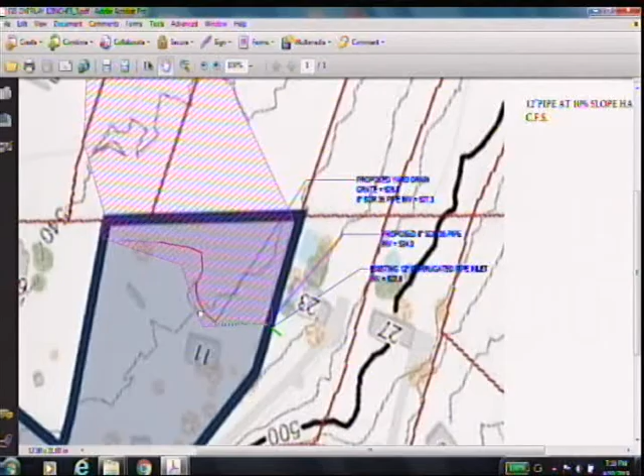Based on Scott's comment, I made a quick analysis calculation for this area here. Based on this shaded area, which is approximately what goes into this 12-inch pipe, the flow going in will be 4.37 CFS. And this 12-inch pipe, based on the slope from the GIS, goes under the driveway of the neighbor and goes into open channel from here along this swale. And then it goes again to a concrete culvert into the catch basin along Glen Hollow Drive in this part.

I believe Scott mentioned to include this area all the way up to here for the calculation. Is that correct? Well, yeah, I was looking for what you're adding to that pipe, what is in it already, and then what the capacity is. So the only number missing, it's a big change, and usually I get the support information too, the input data. Yeah, this is just a quick one. Which I assume you have, okay. So, it's usually the three numbers.

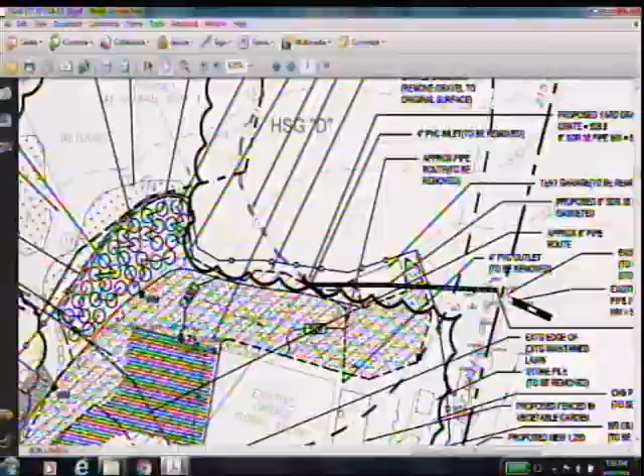And so what are you proposing with that channel on the adjacent property? Yeah, we're proposing to put a pipe from here, redirect this water here, and go into this pipe. The outlet of this pipe will be into the open channel. And it's piped because right now there's a 4-inch pipe from here that discharges to the back of this barn, and sheet flows and contributes to the catch basin here that overflows into the driveway. And during last meeting, it was suggested to redirect and bring it here, since from Scott's map, this area originally drained into here.

Yeah, but the section that it's discharging to right now is open, and then there's a pipe. So the new connection is going to discharge at the property line to an open ditch. Yes, correct. Okay. And then there's a short distance, and then that's going to go into an existing pipe. Yes, correct. Okay. And in that ditch, are you proposing to reinforce that? Yeah, like put some riprap stones, because right now it's just soil.

Right, so the CFS going into the pipe is a little over 4. Is that the same that's going to be coming out into that open ditch? In other words, have you analyzed the discharge point as to what you need for erosion scour protection, based on the CFS coming out of that pipe into an open ditch before it gets into a pipe, so that you're not creating more scour, but actually using an engineered method of avoiding scour? Yeah, right now we don't have that, but we will be providing it, because that's part of Scott's comment, to give the detail of the connection and the open channel there for the riprap.

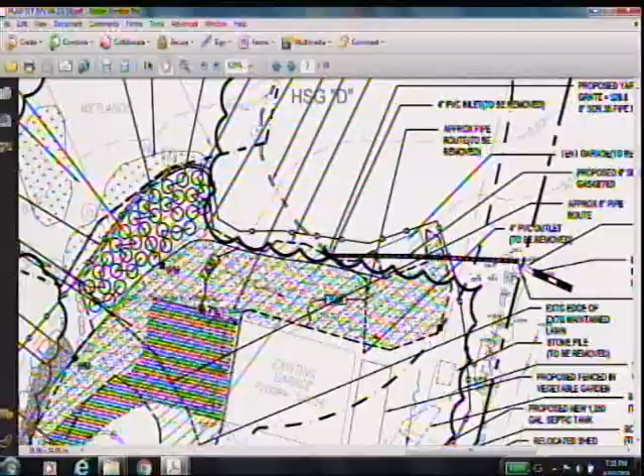And the other comment from Scott also is regarding this pipe that will be connected to this existing catch basin along Glen Hollow Drive. So the details for this connection will also be submitted to Scott once we have that one.

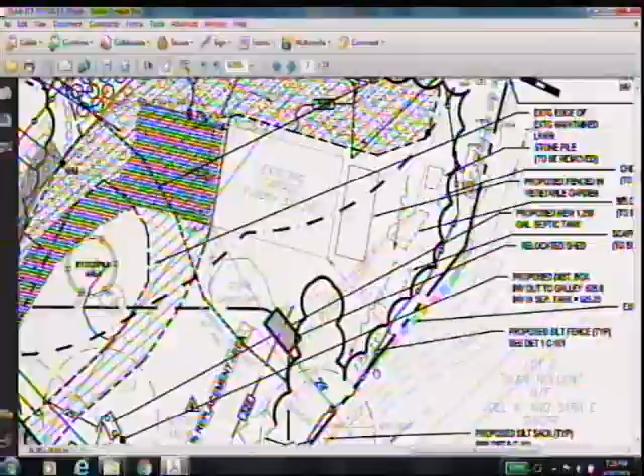I have another question. The invert that is in the proposed yard drain is 527.3. Is that set at the existing bottom of that swale? The invert of this 8-inch, yeah, that's the current. 527.3, that's currently the bottom of that existing swale that you're catching? Yeah. In other words, you're not going lower? No, that's the invert of the existing 4-inch pipe here also. Okay.

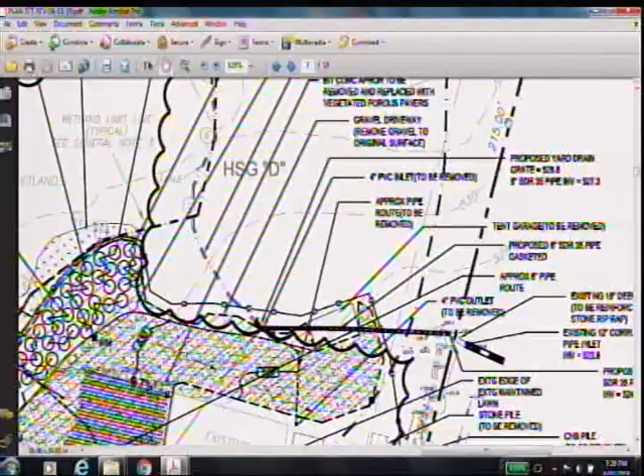So I know that you were here, I think it may have been the very first public hearing that we had on this. There was at least one neighbor that had concerns about how much water's been observed. And I know we had talked about it at the last meeting, with the berm and having a connection like this. Is this, in your opinion, going to address that excess water, the flows that people have been seeing in the neighborhood?

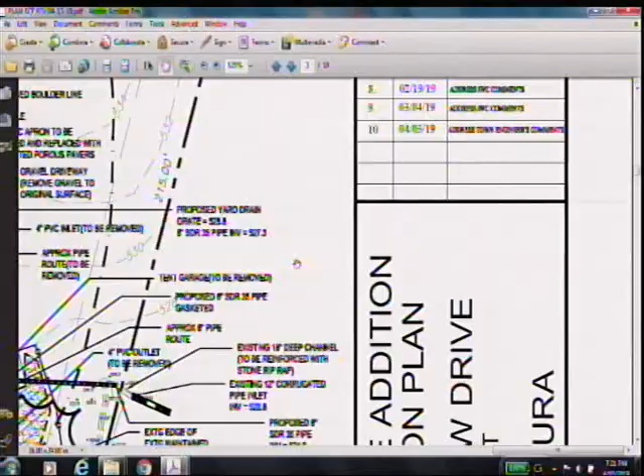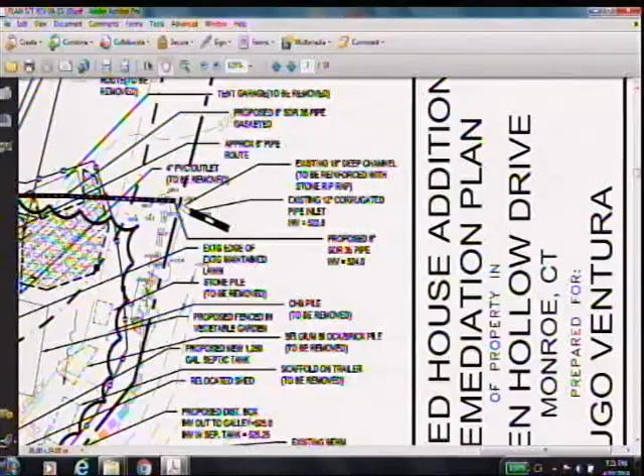This neighbor, number 23 Glen Hollow, is the one that will have the most benefit from this one. The second hearing we had, there was a neighbor from way down, 3 houses down. And actually, we are not providing any water through to him. On one occasion where it rained, our client took a video of the water that's coming from his driveway. It goes to the first catch basin here. Unfortunately, it's in his phone, but it doesn't play in the computer.

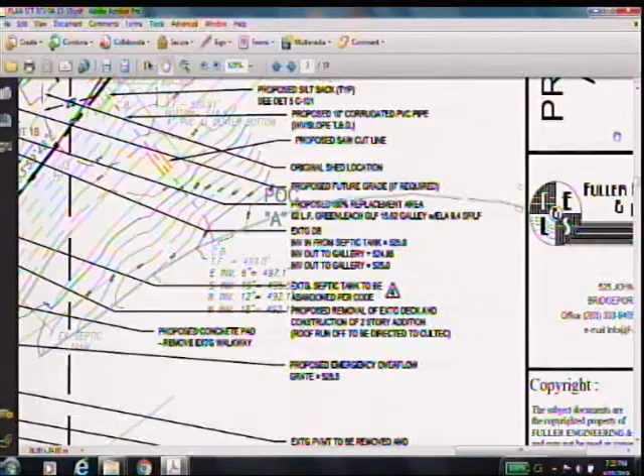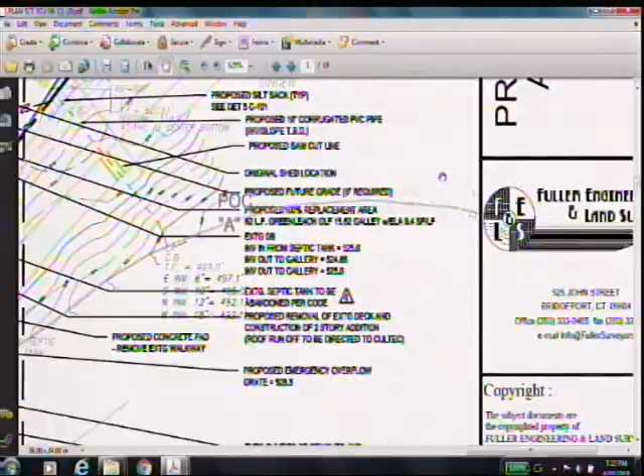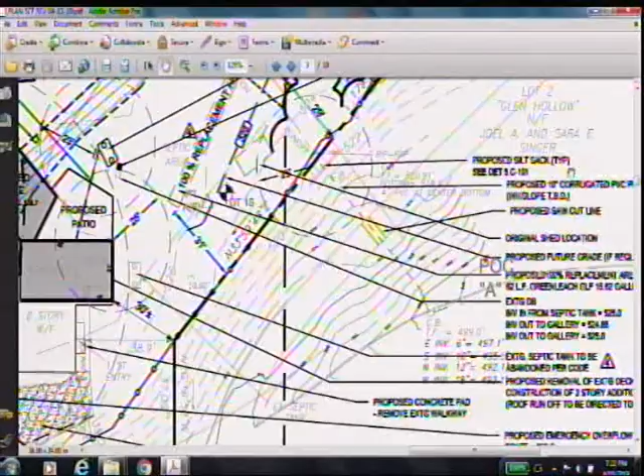The water goes into this catch basin here, and that neighbor, I think number 33, way down here, has no water from these two properties because there's also another catch basin, this one, before it goes to his driveway. So technically, the water is not from the upper properties. Okay. I have no questions. Sounds better than it was before, with all that water flowing through.

Scott, are there many of your comments that have not been addressed by the new application? Well, there's a number of my comments that have not been addressed, but at this point the comments remaining are really about the drainage system on the abutter's property. And it's more engineering, public works stuff. It's not really wetlands. And it's stuff that I could just get verification after you approve it.

Oh, there's one thing I just wanted to add on those last minute comments: an approval, if you grant it, should be contingent on them providing verification of the procurement of a public works permit to connect to the catch basin prior to the pre-construction.

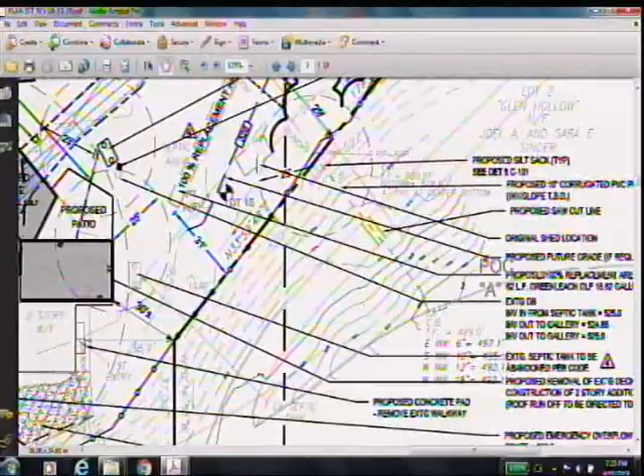The couple of things that I was still concerned about was in the front of this garage. There still is not a heck of a lot of room here. When there's doors in the front of the garage, when the vehicle pulls out, this configuration of driveway here isn't enough to back out and then make a sweeping turn. The vehicle would come more down in this area.

So I don't know if you're willing to take this piece of driveway. If you move this driveway so that it comes down and connects over here instead of where you're connecting it, it would work better, because then, and I don't know if you're gonna put any vehicles in there, because the kind of door that's in there, I'm not sure, you could ask them, but I think they're just using it as man doors to get in there. You're not looking to put vehicles in there, I'm not sure.

If vehicles are gonna go into the garage, then this piece of the driveway should be over here more, so that the truck or the vehicle can pull out and then go this way without doing like a several point turn. Or worse than that, what I'm concerned about is the way the driveway is right here, the vehicle has to back into this lawn area here, which is gonna kind of make a mess and some erosion and that kind of thing.

So my suggestion would be either to propose a little bit of a turnaround up here, or move the driveway so that it connects a little bit down here instead of up in there. That way it would function a little better. Let me just get the other part of this out while you're coming up.

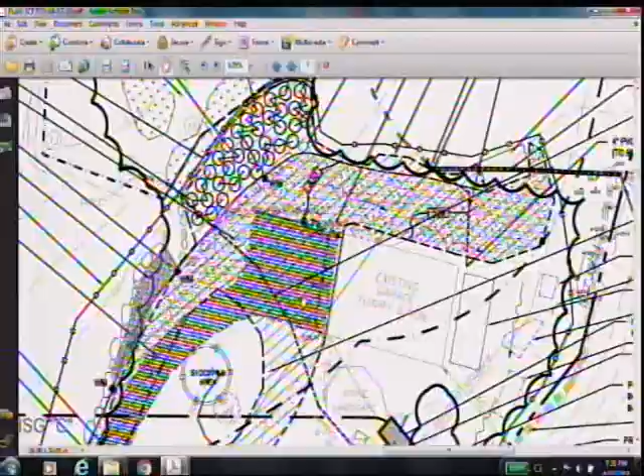The other thing is the comment about the grade differential. I mean, this garage is just sitting in a hole. And when I look at this, I just get a little concerned because there's a good slope going down into the garage. And it just seems to me that if you're gonna do this work, now's the time to address that. Unless you wanna leave it that way, I don't know.

Yeah, that part we addressed, we will be changing the, yeah, it will be regraded. The maximum will be 8.7%, and then at this side it will be a little over 4. So if you're regrading that area, you really should show the proposed grade so we can see what's going on. And then what are you putting it into, an inlet or something where that pipe cuts across there?

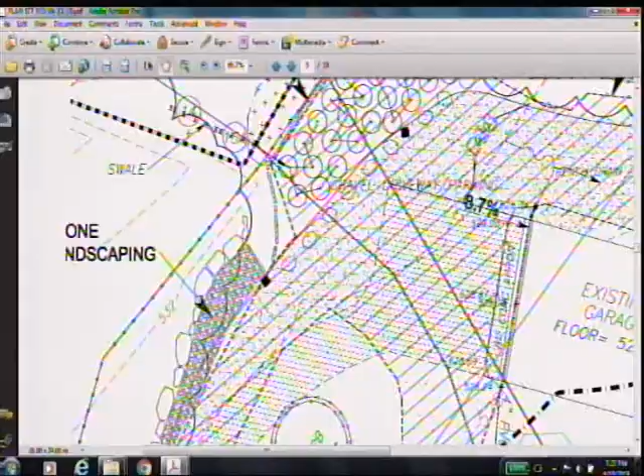This is the existing grade, and from that to this elevation is 8.7. So because the asphalt here, this Bitconc apron, was temporarily placed, and yes, from this point to here is quite a steep drop, but we will be removing the Bitconc apron, and so this will now gradually go back to the 530 elevation here, which will reduce the slope. Okay, so it's gonna drain around the north side of the garage? Is that what you're saying?

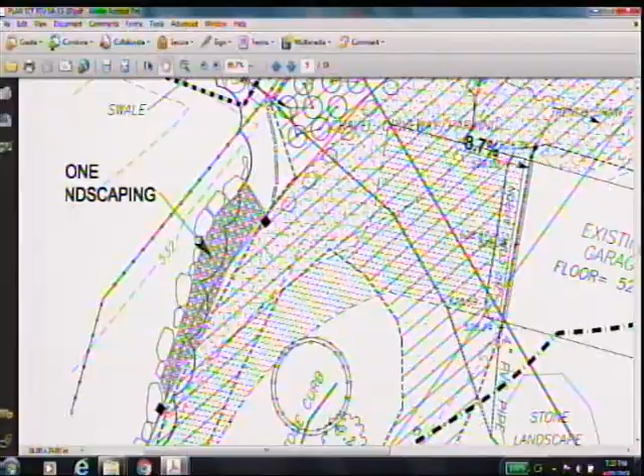Typically, if you're gonna do something like that, you'd show us on the plan where it's draining to. I'm assuming it's draining to the northeast corner of the garage area, right? What will be the ground? Yeah, like, the driveway, where's it gonna pitch to? There's a trench drain here in front of the garage, and then it's

piped to this. All right, so you're gonna cut out that steep, abrupt drop-off and make it taper a little bit more uniform, but it's still gonna pitch toward the front of the garage, but you have a trench drain, which is gonna collect that water and bring it into that pipe that goes over to the catch basin. Correct. Yeah.

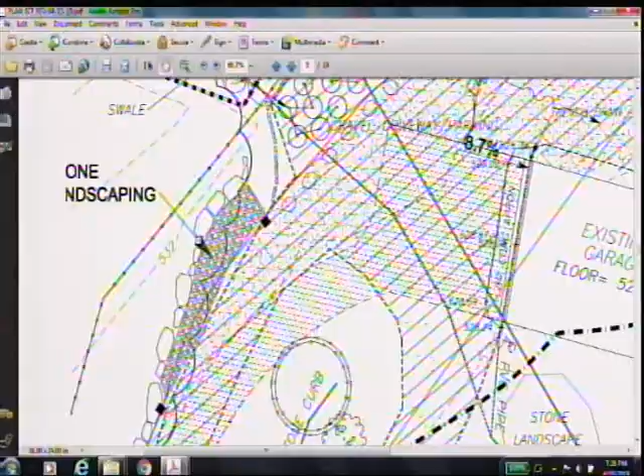All right, I guess if you guys are okay with it, I could work with them to show it on the plan, so we have a record of it. Yeah. I don't think he has a choice. The way the whole thing is graded in front of that garage, no matter what he does, it's gonna go to the right. Yeah.

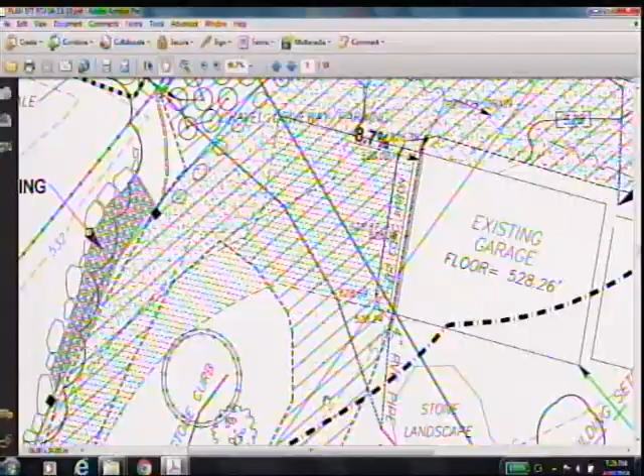So those were the only ones that needed to be addressed; the rest of them are all housekeeping, drainage calculations, plantings. That's assuming you guys are okay with the plantings and all the rest of it.

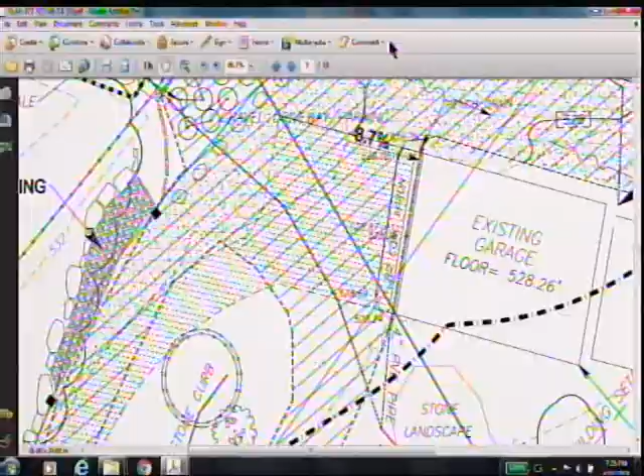Just have a question going back to that yard drain. You could stay on that page. Yeah, right to that. In terms of the logistics of installing it, if there's a rain event and that swale is flowing water, what method of construction are you proposing for installation there to avoid water coming down the swale and getting into your excavation?

During construction? Yeah, during construction. Or if it's gonna be a day or 2 days to install that, I don't know. Maximum of 1 day. He says it's about half a day, then drop it in. Hmm.

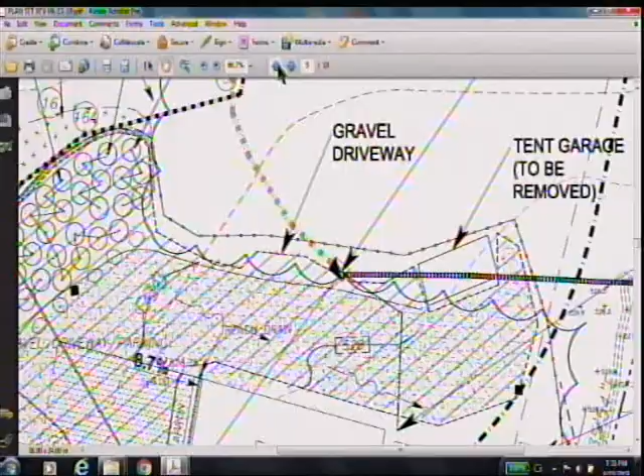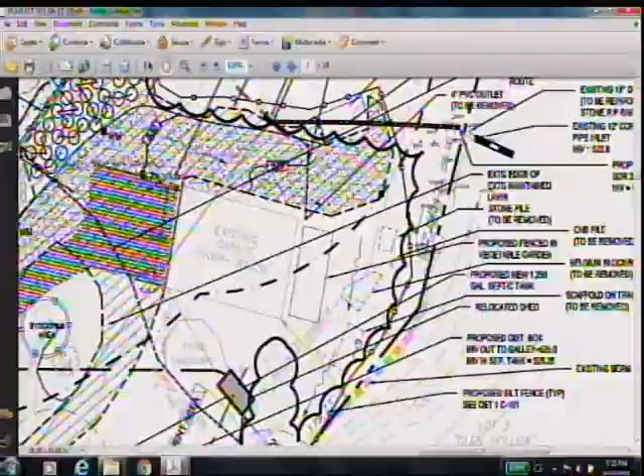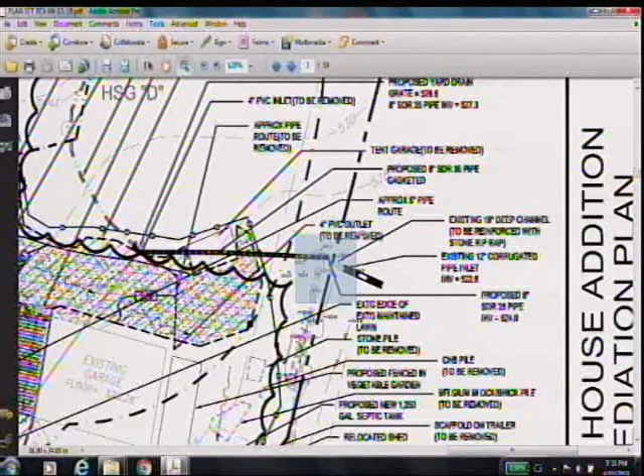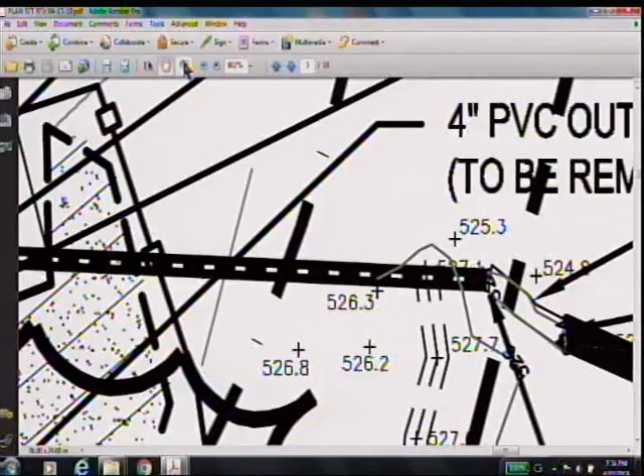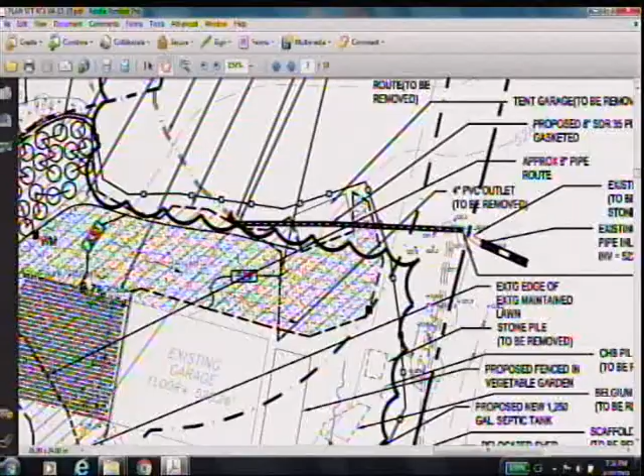So if he brings the gravel right to the surface, and then right to the ends of the pipe, how is that gravel gonna stay above the slope? Or are we talking some type of storm drain, where the concrete top will keep the gravel back on flatter ground? I'm gonna work with them; my suggestion would be to put a shallow catch basin in. That would solve the problem you're talking about. So it'll be below the mouth of the pipe, or it's gonna come into the side of the box? It's gonna go into a catch basin, and then the existing pipe's gonna go out the basin. That would be my suggestion.

And the approval will be contingent on getting that easement. So if you can't get that easement, then unfortunately you're taking the risk, you're gonna be back here again before the commission. But I'm assuming you've been talking with the neighbor? Yes, I already talked to the neighbor. I got a mail from him for today, and he's been confused. I don't have the letter today to give to the commission, but I can give it tomorrow. I can drop it to you personally, because he wants to sign.

And on this call he said he'd try to call his wife because he's in a meeting and doesn't have access to the computer to sign the letter. So we tried to call the wife, but she's not home. So no way I can bring the letter today. But he's agreed to everything, I already explained everything to him. So I can drop the letter tomorrow, Friday. So there's a contingency in there if you don't get the letter. But it sounds like he can bring it, so that's a good thing.

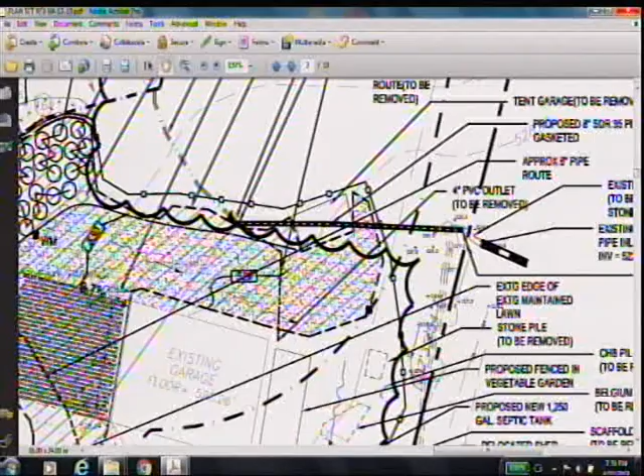All right, that's it for our, just talking. You got- Just got here, Jim. I forgot about Jim. That is it, Jim's taking a nap, on the regular activities.

Moving on to enforcement, notice of violation discussion, IWV 2018-16, 781 Main Street. Unpermitted use within 100, Town Line Auto Body. It says Town Line Body, but I'm assuming that's Town Line Auto Body, correct? Yes. Before Ray starts, I'll just give you a real quick summary. 781 was a notice of violation; you did an administrative review, a notice of violation went out, but the owner came in and indicated to the commission that they understood and acknowledged that they were going to be submitting a submission for remediation to the commission. And so you established a timeline for that.

They're past the timeline at this point, but also on your agenda later on is a time extension that they're asking for to continue on and prepare for that submission. But what has happened since is that Ray has come in and talked with the staff, and they want clarification on what the expectations are for that submission to the commission before they spend the time and expense to actually put it together. So with that, I'll let. Before you start, just so the record will reflect that Commissioner Story is rejoining the meeting at 7:39.

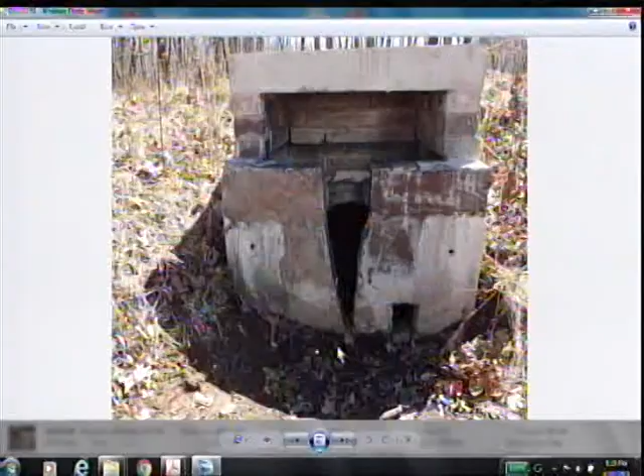Either the ground is there, which you see right here, or there's water there too, because we have a number of pictures through a period of time that show there's water in the basin. Now, when this was approved, the understanding was that they submitted test hole information that showed the redoximorphic features were a minimum of 2 feet below the bottom of the basin. That was provided in their professional information to the commission to justify that it would be dry. We go out there, and there's water in it.

I've got a couple different sets of pictures, and I'll run through them, but you'll see one of them has the whole pond as ice, another one has water. So the water has been in the pond for extended periods of time. As a matter of fact, there's nothing growing in the bottom of the pond, and the reason for that is because you'll see in some of these other photos that the, oops, I'm hitting the wrong one.

You can see that it's wet so much that there's black around here, and it's just mud. There's nothing growing because the water kills it all. So you took those today? I took these today, yeah. Right, sure. So I took them at 5 o'clock, and that's dry already. Okay, and it may drain down sometimes, but I can tell you that it doesn't drain down all the time, and during wet portions it doesn't.

Regardless, it shows that there's no 9 inches below. Scott, go back another picture, one more time, where you can see the pond and the outlet at the same time. So do you think there could be 9 inches between? There is 9 inches on the as-built between that outlet, and there's a little section right there where it creeps up between the pond and the bottom, that V notch, that's 7 feet long between the ponded area and the basin.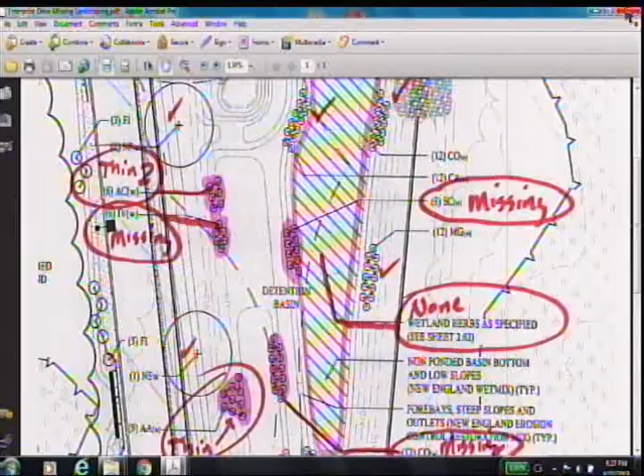Right, here's the landscaping, and again, the bottom of the pond has no plantings in it, it's just bare dirt. That's not the revised plan, Scott. So that's what the issue is. All right, let's back up then. Here's the revised plan. Here is the approved plan, and here's the as-built drawing that we submitted to the town showing that the condition was met, sir.

John, we're looking at photos, there's no grass growth. There's something in the grass. Were there permit conditions that said the plantings would be inspected after one growing season or anything like that? No, unfortunately, there isn't. Didn't they come to us saying that the plants had to move out because they didn't think anything would grow in the bottom of the pond because it was too wet? Was that a different pond? It was probably a different pond.

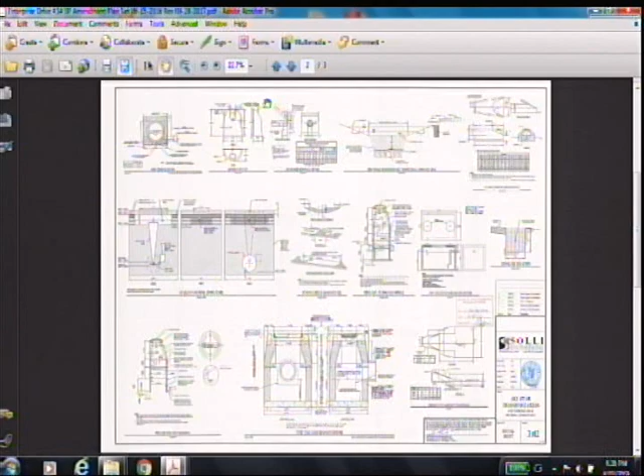I think in this one, we basically said the town cuts the bottom of the basin, and we didn't want to put the plants in the bottom because they regularly mow it, so there's no sense in putting the plants in and having them mowed. The as-built plan that I just brought up shows the basin at 408. The design has the basin at 408. So we built the basin and have an as-built by a licensed surveyor that shows it at 408.

To Scott's point on the storm storage, if the basin continued to hold water, then it might not have adequate storm storage. But it was designed to be built at 408, and the weir was designed at 408.86, which the weir is at 408.86, and the basin's at 408. So we did exactly what was designed, exactly what was approved by the commission, reviewed by both Scott and our engineers, and signed off on. Now, at 5 o'clock tonight, I have a picture showing that basin already drying up.

So the storage that the town needs to get stormwater quality is at 408, and the 9 inches that he's talking about is available for stormwater quality. So what I'm asking for is for the commission to basically return the bond based on the fact that there's two bonds still outstanding here for $10,000, and the recommendation that was made to the Planning and Zoning Commission was not to return any of it.

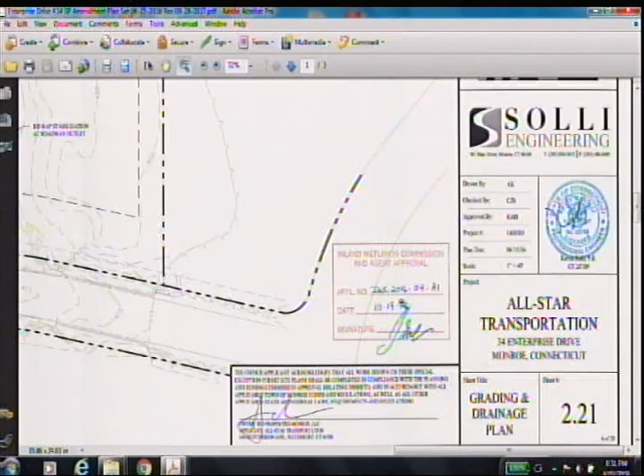Excuse me, do we have the revised planting plan that I can take a look at? Well, maybe John can help with that, because I've got the originally approved plans, and this is the revised plan. It's IWC 2016-04A1, right? And so this is the modification. So the first plan doesn't show any plantings. It's a 3-plan set. The second one is details. This shows the V-notch. If you look here, you'll see that this shows the 9 inches below the V-notch, which isn't in the picture that I showed you.

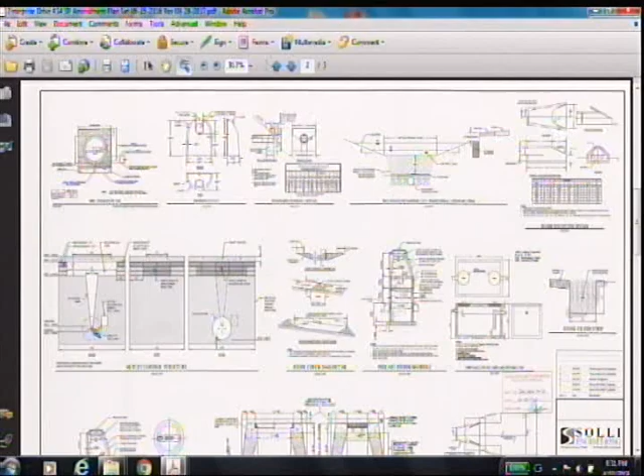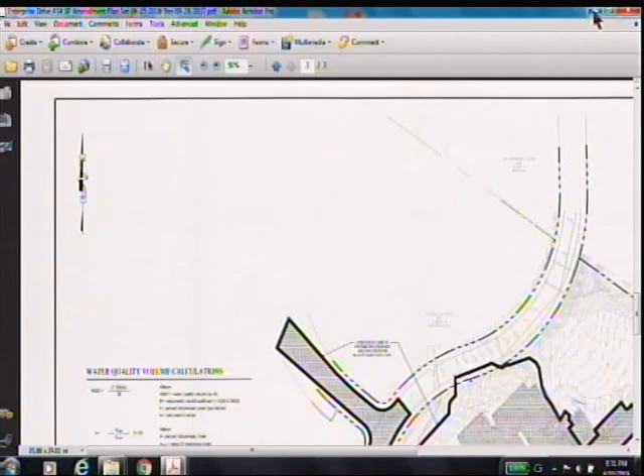And then the third one is this. Is this the plan you're talking about? Those are the 3 plans. Here it is right here. This is the modification approval. And then I've got the original approval, so maybe is there one missing? Well, I don't have the original with me, but I have it over here. I know that we submitted this to both Planning and Zoning and the Wetlands Commission. I have the memo. Here's the approval right here. So this plan shows the plantings.

So Conrad and I went through the file. Inland Wetlands has this modification plan, has the original plan, and the original plan shows the plantings. So I'm wondering, John, if the plan you have... This is 8/15/17, it's the same date as the plans that you have. I'm gonna guess somebody's not working off the right set of plans. I'm guessing that what's happened here is they did a revised plan, it went to P and Z, and never came back to wetlands. Show me the plan that has the inland wetlands approval stamp on it. I don't have one here, because I don't think it went to wetlands.

Did we send an approval letter after the amendment? There's an approval letter for the amendment. Did I see that? Let me see if I can... I have the transmittal letter, and the transmittal was sent to you and Will. That doesn't mean that it's applicable to wetlands, because I'm the town engineer and I'm involved in planning and zoning. Unless you submitted this plan to the Inland Wetlands Commission. This is the amendment approval. Let me see. What's the date on this? 6/15.

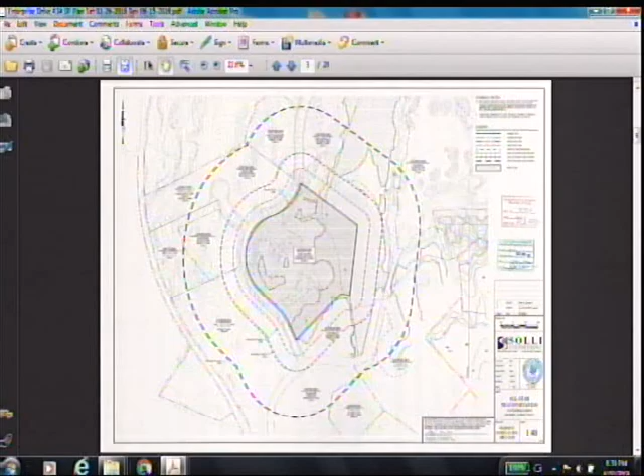I don't vote, you guys vote, you make the decision. All my job is to tell you what I see and put the facts on the table. And that's what I'm trying to do. I mean, maybe before the next meeting, I assume we're not gonna do anything today, you guys can look at the pond and agree with how long it takes for it to dry out to a reasonable extent after a regular rainstorm.

Well, one of the other things I'm gonna try to get a little bit of clarification on too is why is the 9 inches not underneath the V-notch? Is it just because there's a little berm in front of the notch? When you stand there, it doesn't look like it's 9 inches higher. Does that mean that the whole bottom of the pond is 9 inches higher than it should be, or just the area in front of the notch?

Well, that's an answer that needs to happen. That's what he's asking. That's one of the things, because it does change a lot. Because sometimes it's deceiving too. Sometimes you could be standing there and you look at something and you say, damn, that is higher than the other thing. But then you take the shots with the instruments and you say, boy, it's not. It really looks like it.

I mean, you can see from Scott's picture, this is 5 o'clock today, it does evaporate relatively quickly. Because I know it's important to have the storm storage, and that's what you're looking for, and this is surveyed in that as-built at 408, which is that 9 inches, so the 9 inches is available for the storm. So I'm getting there. I think we just have to close in on it. I was waiting for him to call me back, and I'm working on it. Sometimes it takes a little longer.

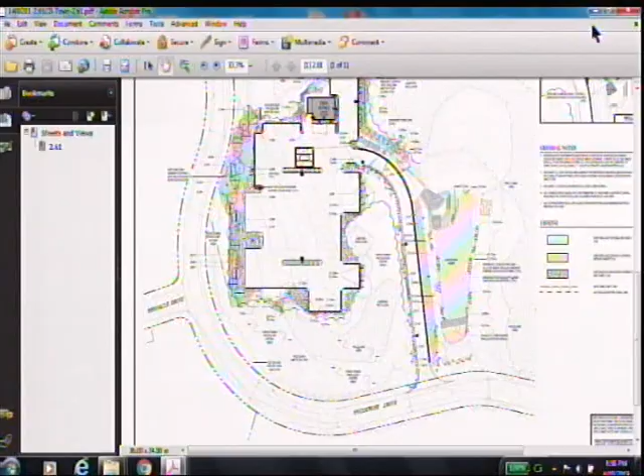And we're disappointed that either the test hole information was incorrect, or there weren't enough test holes dug, whatever it was, we approved it based on the information we were given. But he did his job, he finished his job. He should be getting his bond back. If the elevation is indeed approved, and it fits all the other criteria we approved, technically we're done, we release the bond. But I understand what you're saying, we all want a functioning basin that attenuates everything it's supposed to.

So if you look at it as a black and white matter, to me, there's no question. But it doesn't make me happy about it. I don't know how anybody else feels about it. I think they ought to get together, work through it till the next meeting, and then we talk about it next meeting if there's any issues remaining. There's definitely some issues that can be clarified.

There's definitely issues to be clarified, but the issue we're having is the 9 inches that Scott's talking about is 9 inches of water sitting above this dry ground. That's the 9 inches of attenuation he is claiming we don't have. So we're doing calculations to justify 9 inches of water in that basin. That's the difference between the ground and the V-notch. The ground is at 408, the V-notch is at 408.86.